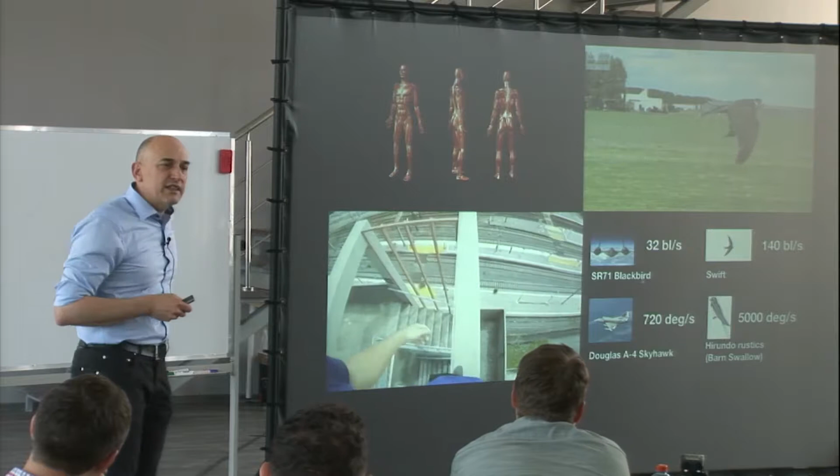No way. And in physics, if you think about how far engineers went, look at these examples of planes - as long as I know, unless there are some more secret ones in Russia that I don't know about. The Blackbird is the fastest plane publicly known, which can fly 32 body lengths per second. And it is nothing compared to a Swift - a small bird that can go 140 body lengths per second.

And if you look at a Douglas A4 Skyhawk, it has a roll rate of up to 720 degrees per second, but a little bird can do about 5,000 degrees per second. So that is the top of the line, and we are far from being able to repeat this. Why I use the example of birds, you'll see at the end - some people know why, but we'll see it at the end.

So what I think is very important is that when you talk about interaction, forget about the standard paradigms in control. That is not what you're going to need if you want to do this kind of thing. So what I will do is concentrate on using a physical structure that Arjan introduced, because as far as I'm concerned, it's the only way to do it. And I want to try to control the behavior. Let me explain briefly.

So what you do normally if you have a robot, people say, suppose I have a robot here, and this is my environment. People say, I want to control, for example, the force. Here is where they interact. Suppose I'm touching this table. In robotic control, people say, okay, I want to control the force I apply to this table, or I want to control the velocity or the position of my hand.

Robustness is a big problem. The environment cannot be properly modeled. Suppose you want to build a robot that shakes hands with a human—I was telling that at lunch.

If you want to talk about stability, and you have two dynamical systems, of which one is the control robot, you know pretty much a lot about it, and one is the human, because that's the dynamical system, how the hell are you going to prove stability about it? You tell me that you have a good model of a human? Bullshit. There's no way.

And you can have unexpected behaviors. Instead, if you use energy, or better, energy awareness, so you do everything by not forgetting that what you are doing is controlling a physical system, you need to track and control the energy flows. That is something that Arjan mentioned. I will go further in that. You have never a problem with stability. I will show you how.

It's a theorem that I can show you later. You are intrinsically robust. Suppose that this is your robot, and this is your controller. Arjan was mentioning this. Suppose that I can, and I'll show you how. This is in discrete time, because you will have sampling and stuff. But suppose you can actually build something like this, suppose you could physically build this thing. This cannot get unstable. This is intrinsically passive, right?

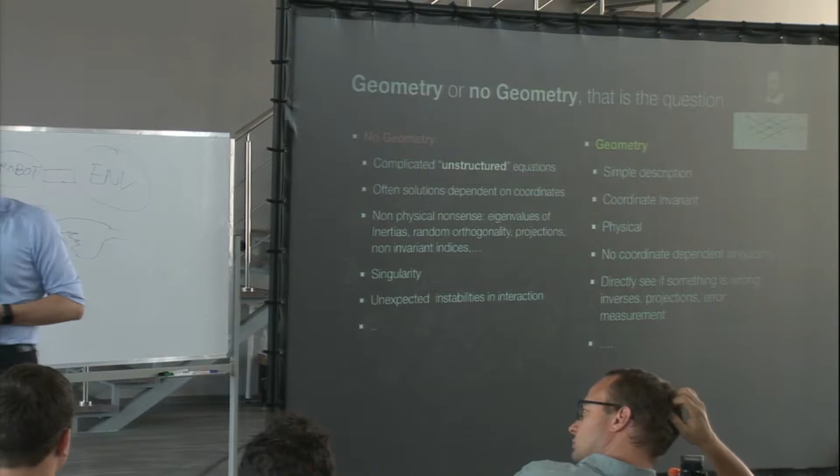A typical example, if anybody of you is working in robotics, is rotations. You know that rotation has a very strange topology. It would be nice to talk about rotation for the whole 3 hours, but what is known about the topology of rotation is pretty nasty. People very often use, in robotics, what are called charts in differential geometry—using Euler angles to describe rotation. It is well known that you cannot cover the whole rotation group with Euler angles, and then you get singularities if you are not careful about it. Instead, there are methods to do it properly and without any singularity.

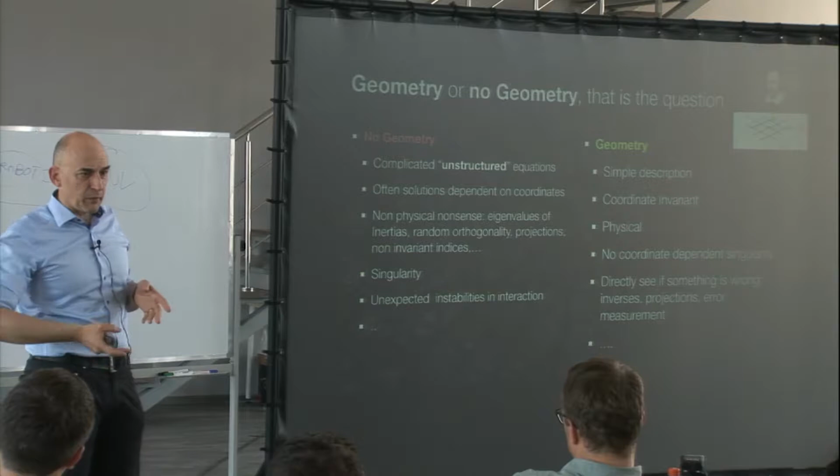And again, projections - that's another thing you see again and again. If you talk about projections, and also Monday there was something about projection, it can be made invariant properly, but you cannot define a projection on a subspace without being careful, because orthogonality, as if you are in Euclidean space, you know you can define orthogonality.

If you have orthogonality, if you have an inner product, that's fine - you can always define orthogonal complements and stuff. But if you are, and certainly that's the case in multi-body dynamics, in a 6-dimensional space, you don't have an inner product. There is no invariant inner product in a space of motion of rigid bodies. So you cannot take orthogonal projection.

Makes no sense. The only thing you can do is define - this is something I hammer all the time, because students have a lot of misformed ideas from bad education about it. So if you have a subspace like this and a vector, and you say I want to project this vector here, everybody would do like this, right? That makes no sense - this implies you have defined a complementary subspace, which is this. But in general, if you don't have an inner product, it depends on what subspace you define.

Suppose I define this subspace - the projection of that vector on this, along this subspace, would be zero. So it really depends. Be careful about geometry and the choice that you make. And this is the point I want to talk about, because in the case of multi-body motion on kinematic pairs - I won't talk much about it - this space is called SE3, a 6-dimensional space with no inner product. So when you want to talk about composition of motions, you have to be precise, otherwise you make assumptions which are nonsense. So geometry is very important.

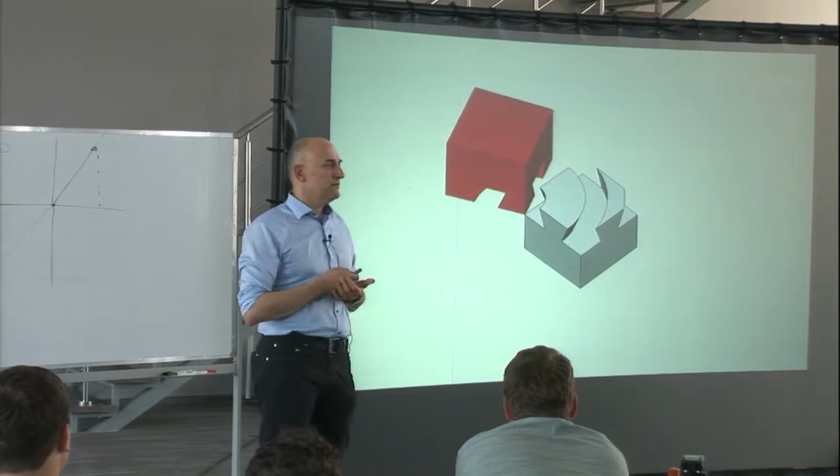Okay, now you see, well, you tricked me. Are there other solutions? There is clearly a symmetric solution, 90 degrees. Are there more? Now you start thinking. To be explicit: you fool me once, you won't fool me twice. Well, it turns out you have an infinite number of solutions, which are all hidden. This is another one. There is another one - I think I have 3, 4.

But why do I show you this? I think this is a typical situation where if you've always been used to seeing things the same way, you don't see what is behind. So in control, and certainly if you're doing control in robotics, you've always looked at regulation problems, control of position, of forces - that's the way you think. You don't think differently.

And instead, the paradigm that Arjan started to introduce today is different. You look at it differently - it's not just about signals. Physics is not about signals. Physics is about physical interaction via energy. And the structure you need is the structure of power ports that Arjan introduced this morning.

Okay, so what I will talk about in these 2 hours are 2 things. The first one is energy-aware robotics, which will basically show how to handle robotics, and some tricks that Arjan already anticipated. Then I will talk about something a bit more advanced, but very, very basic.

I want to show you that if you want to interconnect parts which are very complicated, like a network of resistors and inductors, there is not much geometry there. But if you want to talk about multi-body dynamics, that's a different ballgame. If you want to model a human being with all degrees of freedom, that's a different ballgame. You'll need certain other structures, which I will tell you why you need.

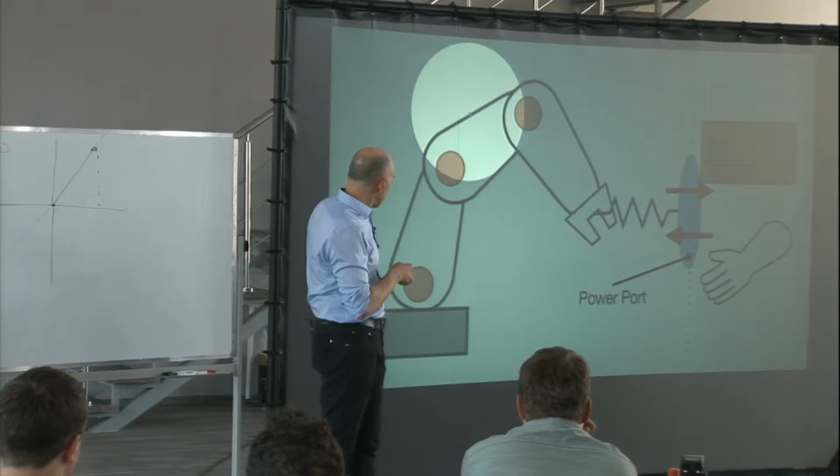Good. So, also the issue of robustness was mentioned a couple of times, and this is an example I was doing for the table. What is interaction? Nothing else than this: you have a robot that you control, whatever it is, and you have your environment—the hand, the wall, whatever. Interaction of the robot and the environment will be bidirectional.

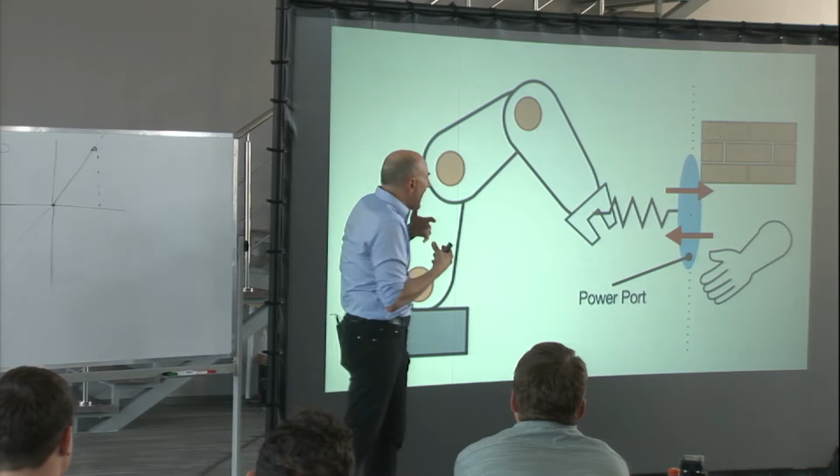This is the issue I was mentioning before on behavior. You can control how my system will behave with the environment, but I cannot control only this variable, because this variable will depend on the other one. It's bidirectional. So, as introduced this morning, this is actually the paradigm you need: you have a controlled robot, and then you have the environment, with these bidirectional signals. And this is causal. Now, it was not presented as causal.

In principle, physics can describe everything acausally, and I will show you—this representation that Arjan has shown is completely acausal, and there's a lot of advantage to that. Actually, he presented two situations.

So suppose that I want to describe the behavior of my controlled robot, okay? Then you will have something like this: effort plus F flow equal to 0, where these efforts and flows are the two variables which are there, okay?

Now this is acausal. I just say there is a relation between efforts and flows, right? And the environment will be something similar. So this is the robot, and the environment would be something like that as well. Environment F, okay? Once you have these two things together, you can solve them and get effort and flow as a function of time.

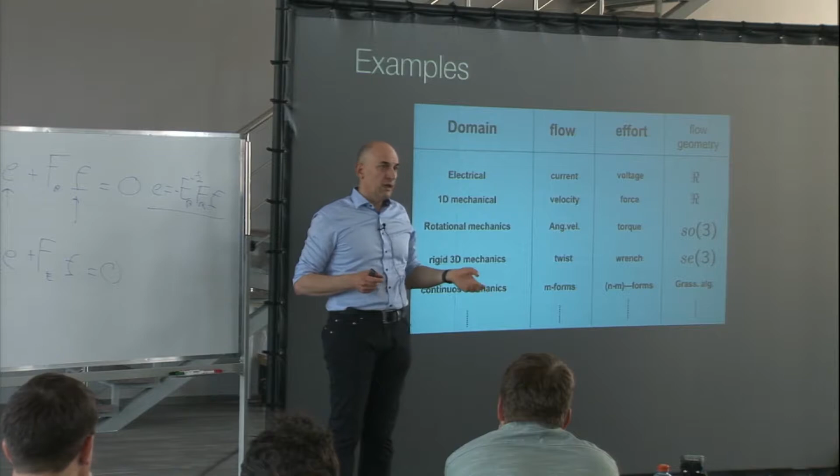And then these efforts and flows are not just a bunch of real numbers, they are geometric entities. You know what a covector is, duality? You know what a vector is, you learned to talk about vectors. A covector is a different thing - a linear operator from the space of vectors to real numbers, okay? And if you talk about mechanics, velocities are vectors, forces are not vectors. Forces are covectors, okay? They transform differently.

And if everything is orthogonal and stuff, you don't need to bother about it. But if you talk about multi-body dynamics, nothing is orthogonal, so you have to bother about it, okay? And the geometry will therefore be given here - I will tell you this is actually our Lie algebra of a Lie group, and I will tell you why you need to talk about Lie groups in any case. That's the second part of the lecture.

And you can go to continuous mechanics. I'm going to show you something about it, and the geometry there is even a bit more complicated - it involves differential forms, Grassmann algebras, in which you have to introduce new concepts, this duality, and how you define the Dirac structure, things that Arjan mentioned before. So it's important to realize that in this business you need something like Lie groups, and this will be the second part of my talk.

And you have water. The water flowing through this pipe is energy, and is incompressible. So if you pump water here, the water will come out somewhere else. And if you pump water here and here, it has to go there. If you pump water here, here, and here, and here, it has to get out from that - there is no other option. So the total amount of water going in is zero. That's the fact that Arjan showed, that is power continuity, okay?

And it has again this structure in which basically this R here will be all the damping, and this C here will be the storage of energy, kinetic, potential energy, and all these kinds of things.

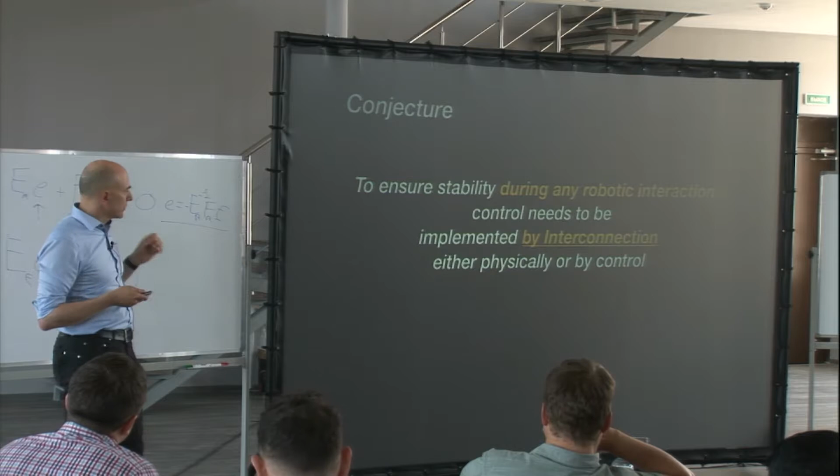So the conjecture, which actually cannot be proven formally, is this: that to ensure stability during any robotic interaction, control needs to be implemented by interconnection. And I will go more into this, Arjan already introduced it, but I will expand on it.

Either physically or by control. What do I mean by that? First of all, what is control? When you think about control, you think, okay, you measure something, you use your computer or whatever nowadays, you do calculation, you steer something. That's control. But control is also building a machine in which you take a spring and place it in the right place. Control is changing the dynamics of a system you're given. So you can do it that way.

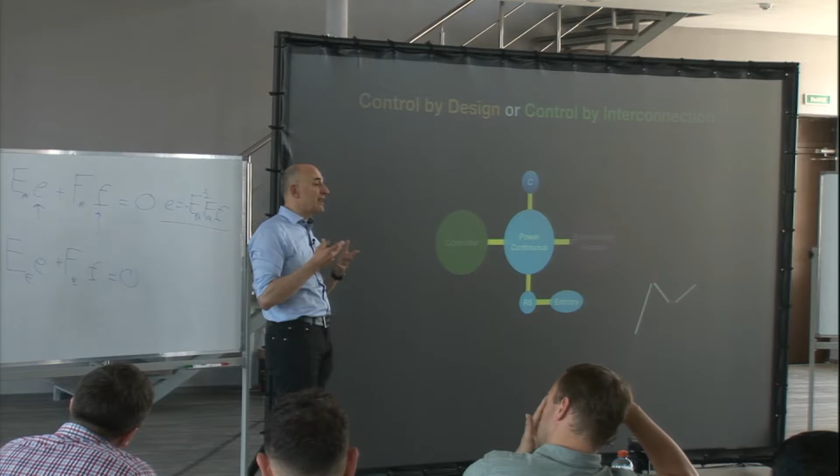So suppose that, with what you've seen this morning, you can model everything with this framework. So what you could do is say, okay, I model my mechanism, and then for control I could say, I have a spring which I can model in the same way. And Arjan showed you that it's basically an algebra. You have a Dirac structure, you can formally prove that you can assemble it, you get a new Dirac structure, and you sum the energy. It's like an algebra which stays in the algebra.

So basically what you do is something like this: you get a new system in which you interconnect the spring to the mechanism. This is your control system, which now has a new port, depending on how you build it. This is one way of doing control by interconnection. This is physical interconnection. You basically take the spring, you solder it onto the machine. And this is very useful.

What you can do, actually, what we did, for example, I will come to that later. We are here at ITMO, building a cheetah. This is something I did in the past with somebody from MIT, the MIT cheetah. One thing was, for example, you have the back and the front of the cheetah, and a lot of cyclic energy. Why is a cheetah going so fast and so amazing?

Because it's not doing control by signals, but it understands the physics. Basically, the muscle structure and the springs and tendons in the spine are such that it can use the energy very efficiently. So basically what we did, if you want these things to locomote, all the force that you would actually inject and damp by normal control, you can do it by placing a spring in the right place. And this is actually what we did in this work. I will talk about this more specifically later.

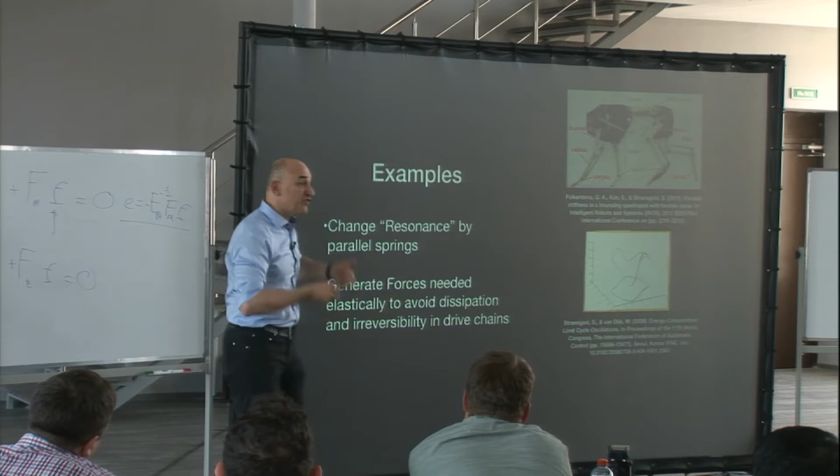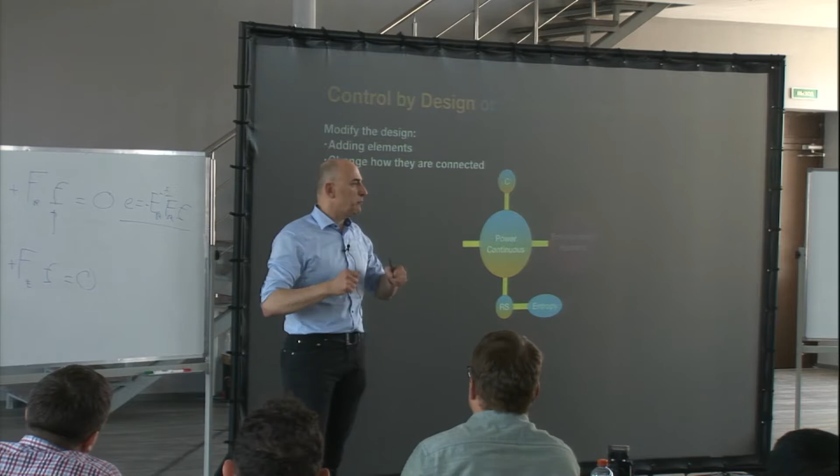So this is physically, we put a spring in the thing, and we're actually doing something similar here. What we also can do, still physically through control, is this: very often when you have something that oscillates, a mechanical system, what do you do? You inject damping. And inject could be by control or by putting material. If you have something that vibrates, like a drum, what do you do? You put something damping, some mass, and try to damp it like that. So if you have a machine you want to stabilize, damping may be a solution.

But damping has disadvantages because it solves your problem, but it costs you energy. And if you have a mobile device, that's not what you want. So you can achieve the same effect but store this energy somewhere instead—you can be much smarter than that. What you can do, with these RS elements I talked about before, is build something that, if you look at it from this side, feels like a damper. It definitely feels like a damper.

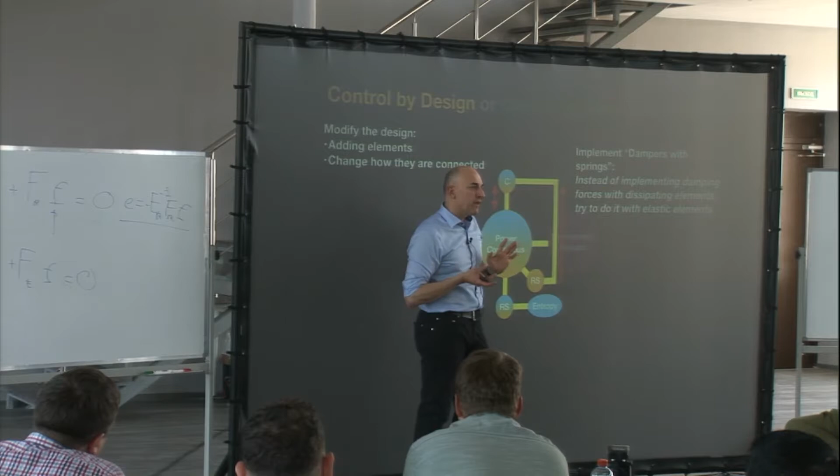Instead of building something like a damper where physical heat is generated and thrown away into the air, changing the climate, you can build something that feels like a damper, but the energy isn't thrown away—it's stored, and whenever you need it, you use it again. This actually works very well.

This is a patented device that we built—a prosthetic device. Basically, what it does: you see this line here that connects the upper femoris to the ankle down there. This extension is basically a spring.

When you move the leg, you have kinetic energy in the lower leg. When it's straightened up, that kinetic energy is stopped with this spring, done in such a way that when the leg is straight, that energy is completely in the spring, but then it's blocked—it doesn't come out anymore. It's like a damper from the side of the motion.

Ottobock and Ossur, which are the leaders in the world on this, are two enterprises that sell a lot of prostheses. They have a rheologic knee—a knee that basically, with the fluid, the brake energy is gone.

With these things, what we do is use this energy—you see this switching here. In the next step, that energy is used for the gastrocnemius muscle, because walking is nothing else than falling all the time. So you raise the potential energy, you fall. Next step, you raise, you fall. You raise, you fall, and then energy is regained. In this way, we regain 80% of the metabolic energy that would otherwise just be thrown away.

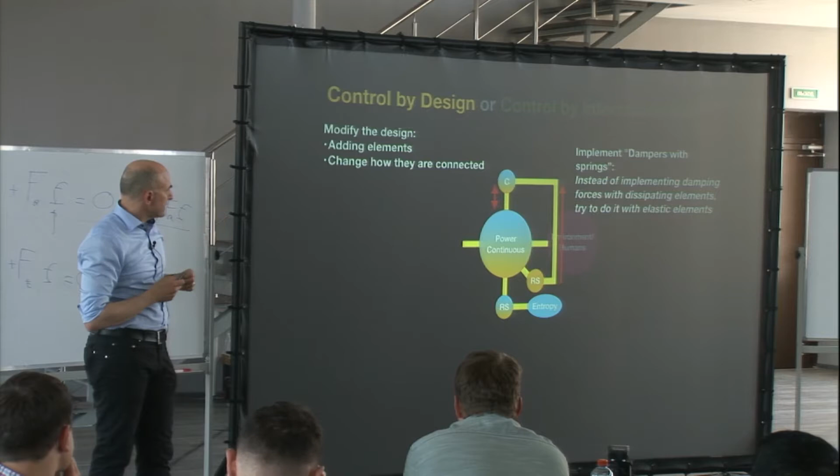So this is a much better device. This is the idea of using the energy, but of course you can also do control—I'm going to show the most standard way of doing control, but without losing these features. So this is one way of doing it, but how can you do it properly?

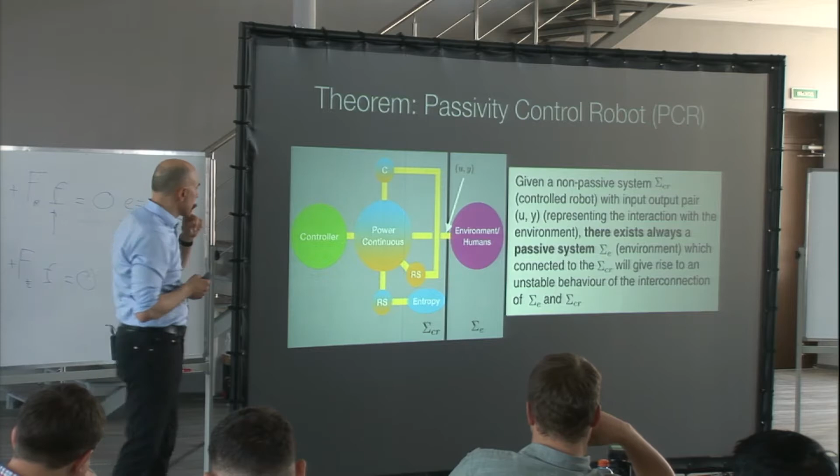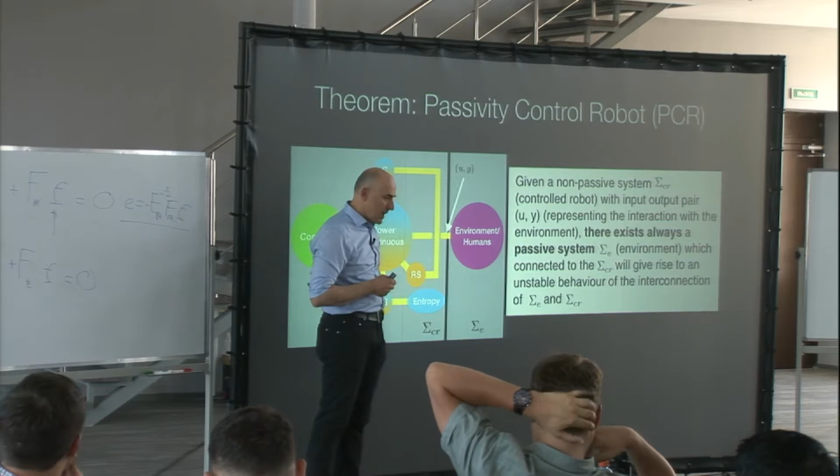This relates to the theorem I mentioned before, which I proved formally. It tells you this: suppose this is my controlled robot, and this is the port—the port of interaction with the environment, the interaction port. I proved it formally, and the proof is amazingly simple, but no one had done it before.

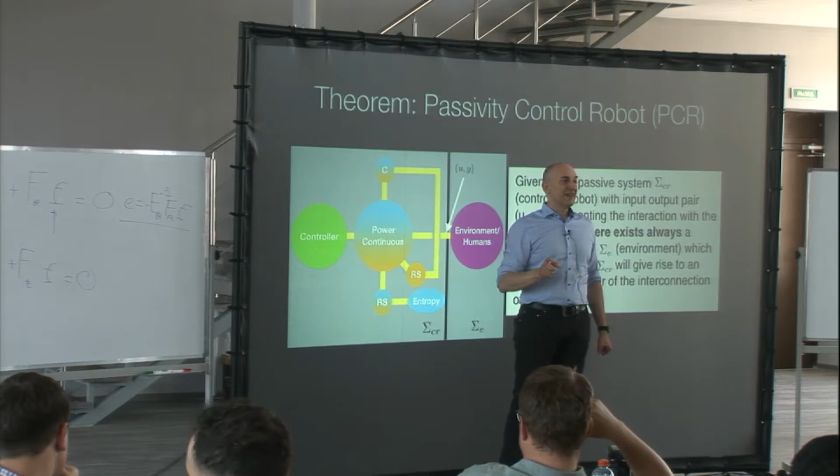If the system—now I'm looking at the system from here—if it is not passive, or let's say the energy which I can extract from this port is not lower bounded, so the controlled system, with the control and everything, allows me to extract energy, then I can prove that I can constructively find an environment which is passive, which is lower bounded, but such that if they touch each other, the system becomes unstable.

This is interesting because I'm saying that if you want stability in interaction, at least for a passive environment—whatever structure it has, a table, a floor, a human being, which is passive in principle—the only thing I can do, with no structure information, is to make this system have lower bounded energy. So it's really a necessary condition for stability that the control system is passive, that you cannot extract energy out.

So what does that mean? It means I can immediately exclude state feedback in the standard way. Because if you do state feedback, you lose what is known as collocation—if you measure something and actuate something else, you lose track of energy flows immediately. Do you know what collocation means?

If you have collocation, it means that if you have a motor, with the motor you apply a certain force, and you can measure the corresponding dual variable at that same spot—that's collocation. For example, if you have a motor here with an elastic torsion spring, and you measure the position here, you know you can have vibration; stability becomes an issue because you have no collocation. But if you measure here, it's not a problem, because you can always monitor the energy you inject into your system. The idea is that if you do state feedback, you measure here and actuate there.

So this is the system, okay? Suppose that this is your robot. The first step you can do is say, okay, I put actuators. Actuators are a physical device which are passive. An actuator has a mechanical part and an electrical part. So far, so good, it's still passive, okay?

So what you do then after the actuators, you put an amplifier, right? You put a power amplifier to drive your motors. And there is where it starts getting nasty.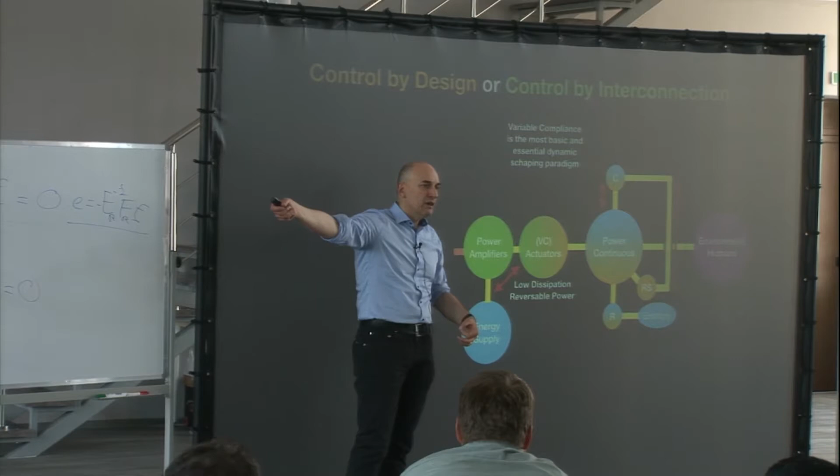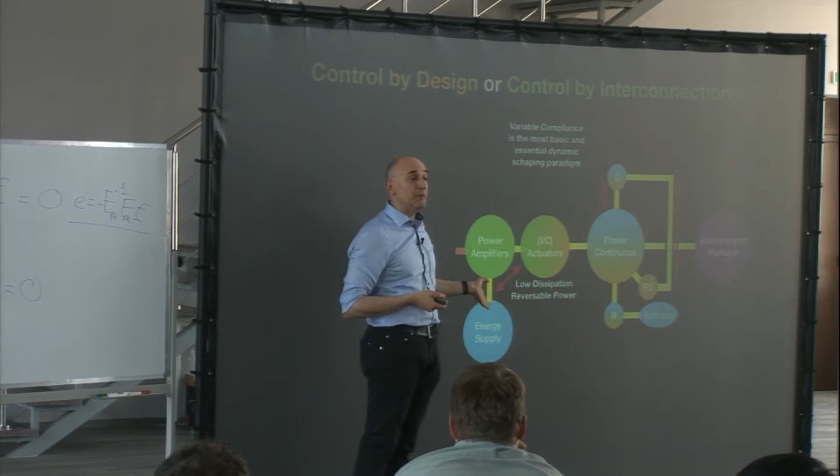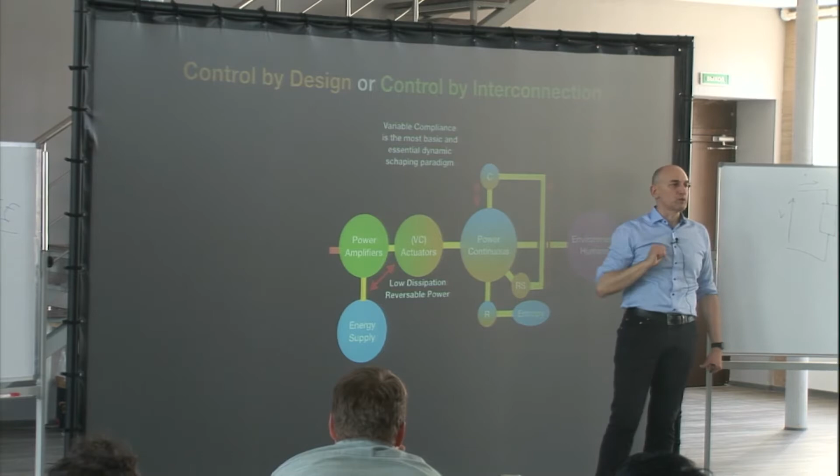Because what do you do? You connect this to a power supply. So what you actually do is you have either a battery or a power plant behind, and you can have an energy flow to your system which is unbounded. That's something you don't want, because I showed you that if you do something like this without thinking about it, what happens is you can extract that energy in one way or another, and you can get all the energy from the power plant close by, and the system can get unstable if it touches an environment which is even passive, as I showed you.

All right, now what can you do about it? Well, you can do something. This is continuous time, we are in continuous time, the physical devices. So if you do control like this, where you just measure something and actuate, this is prone to error, because as I told you, it will not in general satisfy the fact that you cannot extract unlimited energy from the environment. So you have to do it differently.

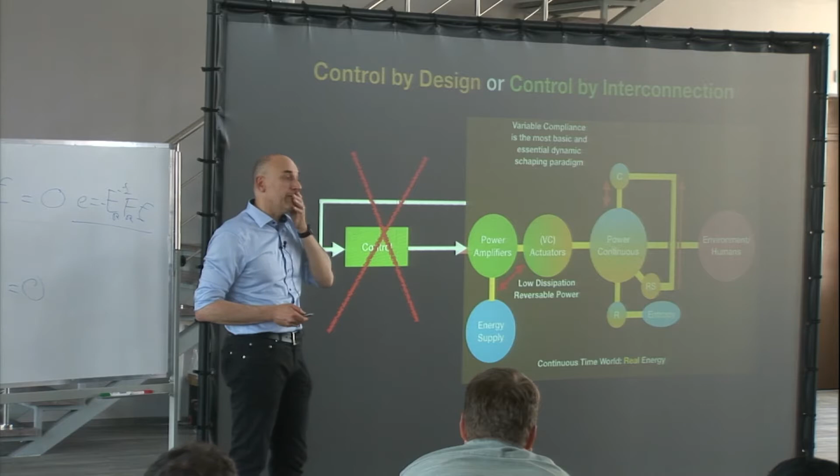And the first thing you need to do is virtualize the energy flow. So what you want is that your power amplifiers, of course, are attached to the power supply on one side, and on the other side, if they are a transistor bridge, H bridge, I don't know if you're an electrical engineer or whatever, you have the signals that control your power amplifier. That's the value that determines, and from there you determine how much power, physical power, you inject, at the base of your transistor, your MOSFET, whatever.

So you want to do something like this. And then what you do, then you are in discrete time. You see, I changed the color. Now everything which is in orange, I want this to behave like power bonds, but now it's virtual. Here's physical energy, it's the real stuff, the energy in Joules, that if it falls on your head, you feel it. This is the virtual one.

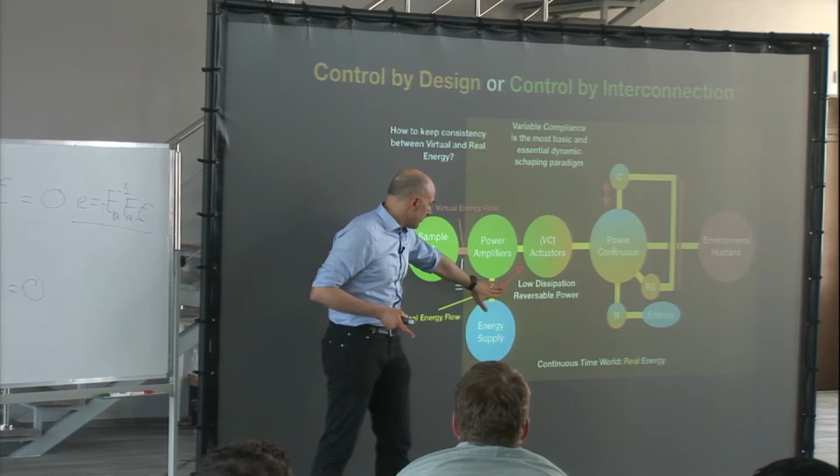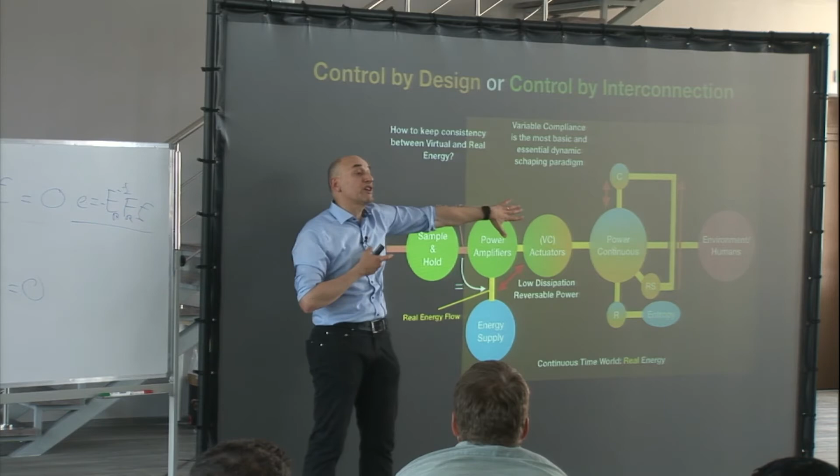But I want to do things in such a way that whatever comes here is the same as here. So basically, this physical energy comes from here, clearly, but I want to do it in such a way that whatever goes here is the same as here. Because then I can build a controller which knows what's happening physically, and that's the idea. So that's the real-virtual energy flow.

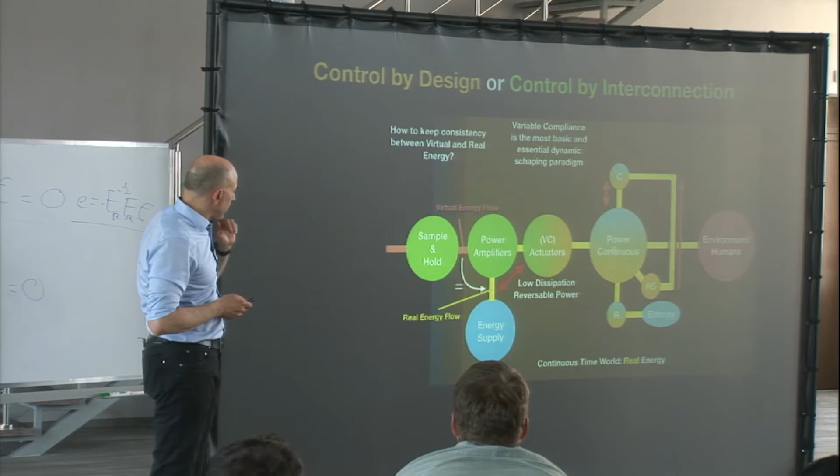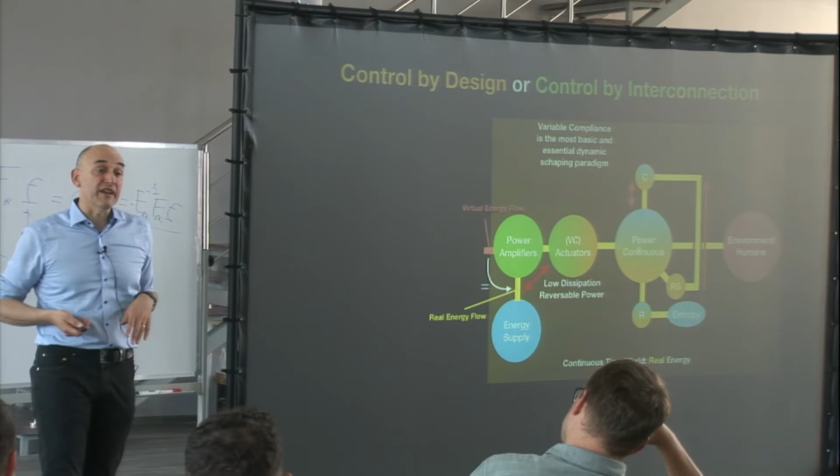So, can you build this coupling? This is the issue here, because very often when you do control, standard speaking, you say, okay, I have to develop control for a physical system. How do you develop your control for discrete time? You say, okay, if I have a high enough sampling frequency, then you can do the control design in continuous time, and it's okay. Or you do a complete discrete design, that's another option. But here it's different, because it's not just about the signals, you want energy consistency.

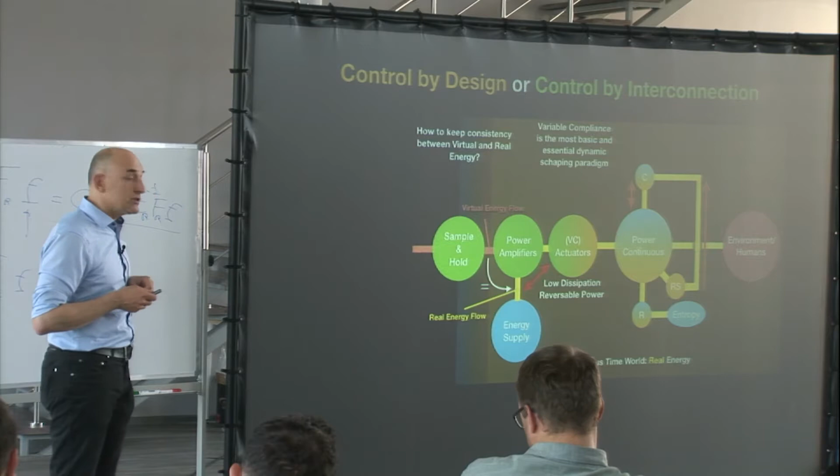So what you can do is actually very simple, and it's indicated here. Suppose that now you have a robot, and you have your controller.

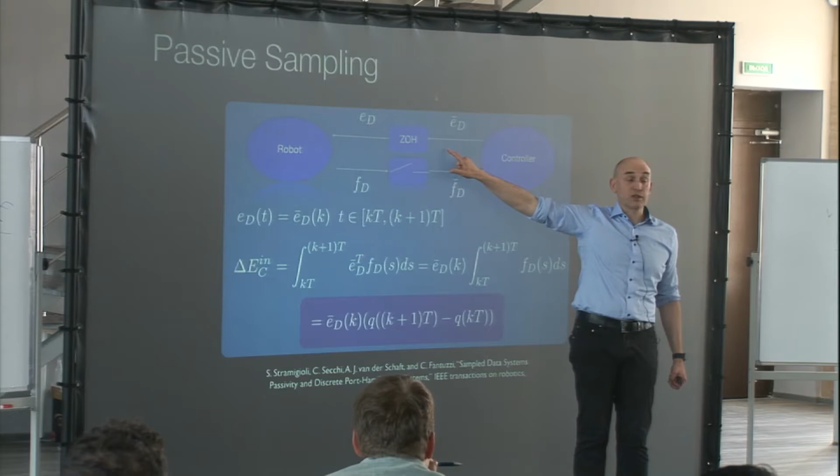And what I see is a lot of reflections. So in the middle you have a zero-order hold. Suppose your controller sets a certain force or current, usually through a current amplifier, then you have a voltage loop. So you can set a current on the armature of your motor, which results in a force, right? And this is furthermore a zero-order hold, meaning it keeps that force constant for the sampling period.

Okay, look at this, what I'm doing is the following. Suppose time goes in this direction, so here's K, and this is K plus 1, sampling speaking. What I'm doing here is I measure the position - I'm talking about one direction, one motor for now - I measure the position and I set the force. Then things move. The force is constant because the zero-order hold will keep that force independent of what the thing does. So the force is constant, and now I'm at K plus 1. What I do is measure the position again, and set the new force.

What can I say about what happened? Well, the force I know because I set it before. And I know the position when I started to set that force, and the position now. It turns out, which is pretty trivial, that if you want to calculate - and now I'm not approximating - the physical energy quanta that was exchanged from here to here, this is not an approximation, this is physical energy. What is the physical energy? It's the integral of the product of force and velocity, the physical ones. The force I know because I set it and it was constant, so you can pull it out of the integral. You're left with the integral of velocity. What is the integral of velocity? A position. That's not an approximation, that's physics - if you integrate velocity, you get position.

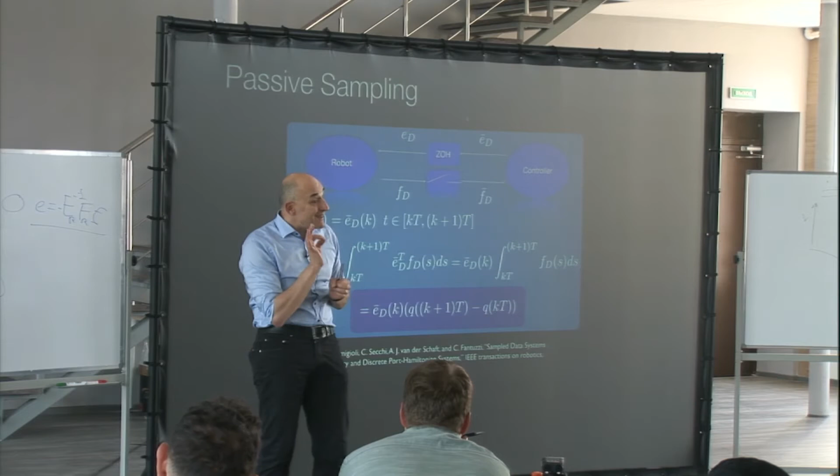Well, of course, what can happen if the dynamics of the system is big enough, is that I measure zero energy exchange from here to here, but a lot of energy could have gone out and then a lot came back, and I measure nothing. But if the sample time is not 300 years but decent, at least you know you're not making bullshit - you can exactly know how much physical energy has been exchanged with the physical system.

But that's exactly what we needed, what we wanted to do, because then I know how much energy went from my amplifier to the plant. So if I have a variable in my discrete controller that says, okay, this is the energy I want you to use, and it was 100, and I measure that I gave 1 joule instead of what's needed, I just change the value of that variable to 99, and everything is perfect. Does that work? Well, it works pretty well, actually.

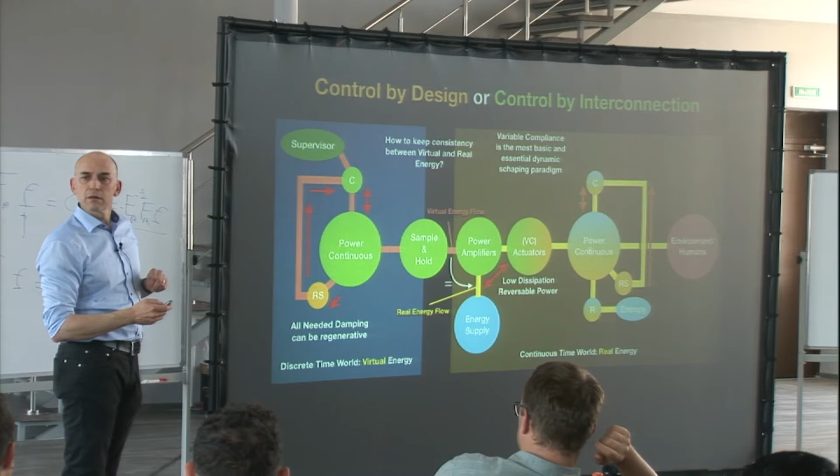So if you have this, and you do the sample - oh wait a second, should be a video to show you that it works. Wait a second now, because I want to show you this. Strange. Oh, it comes back later, okay. Yeah, no, okay, it's later.

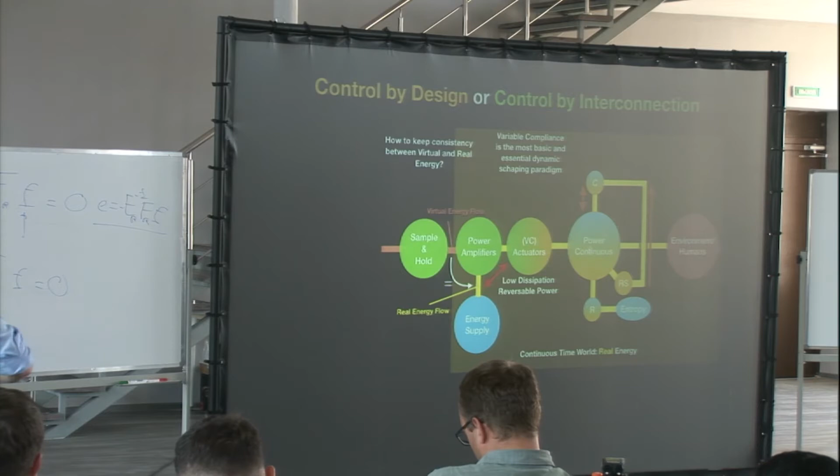And then once you have taken care of this balance, the energy balance, okay, we solve the problem of interconnection between the continuous time and discrete time. This is actually what I showed you before, and you have the fact that you want to do your control design.

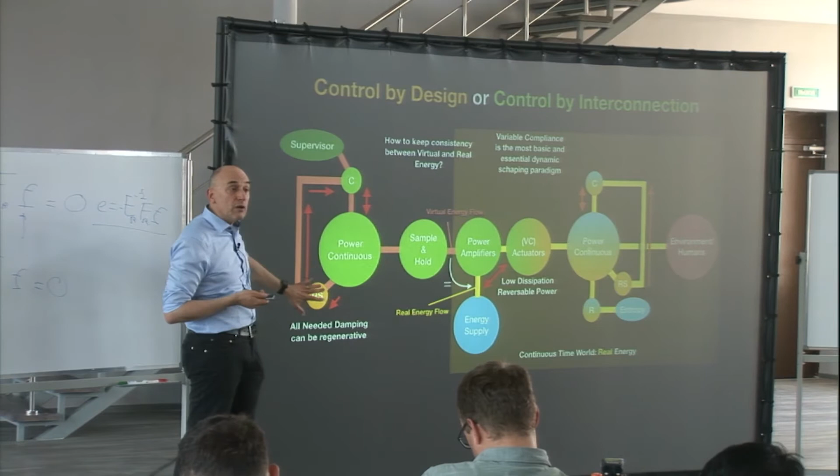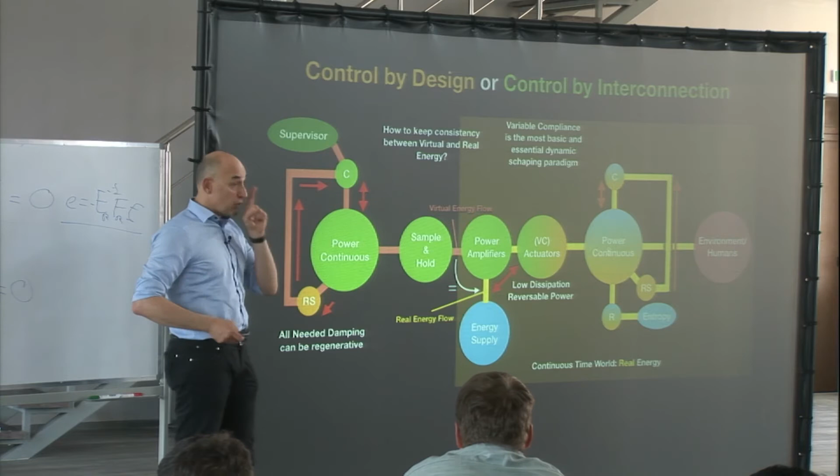What you want is to make a control design which is physical. Because if you have a physical equivalent kind of controller, with physical elements like springs and dampers that are passive, then you know that whatever I do, I can never extract more than the energy I have at my disposal. Everything is done on the basis of energy balance, you see?

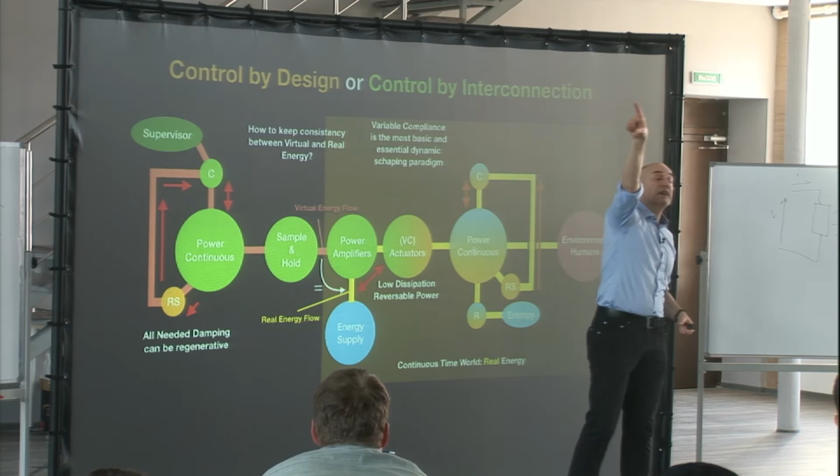But of course, to do work, you need energy. If you ask a robot to bring me these bottles, bring it upstairs, you need energy, of course. So how do you do it?

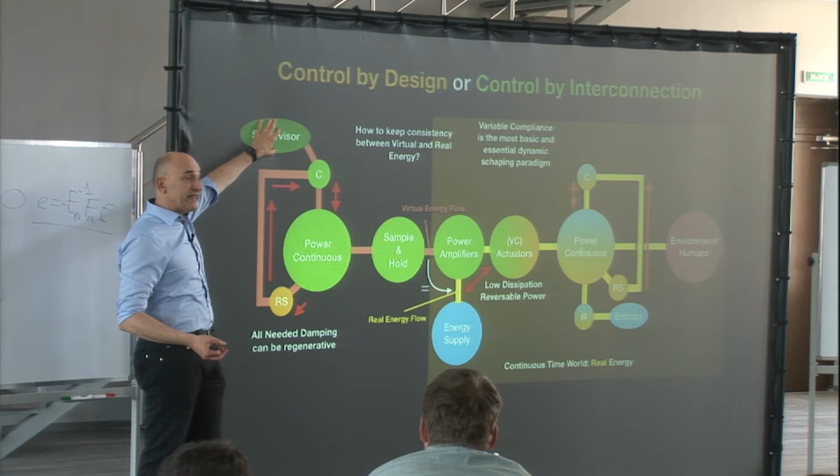Well, it's clear that you will have a supervisor, at a lower frequency rate, which will basically say, okay, you need to do that, that's a budget I give you. You're too young to have kids probably, but when you have a kid who doesn't know about money, you don't give a credit card. You say, okay, here's $10, buy this. And if it comes back saying it was more expensive, okay, I give you more. That way you're sure your bank account isn't going to hell.

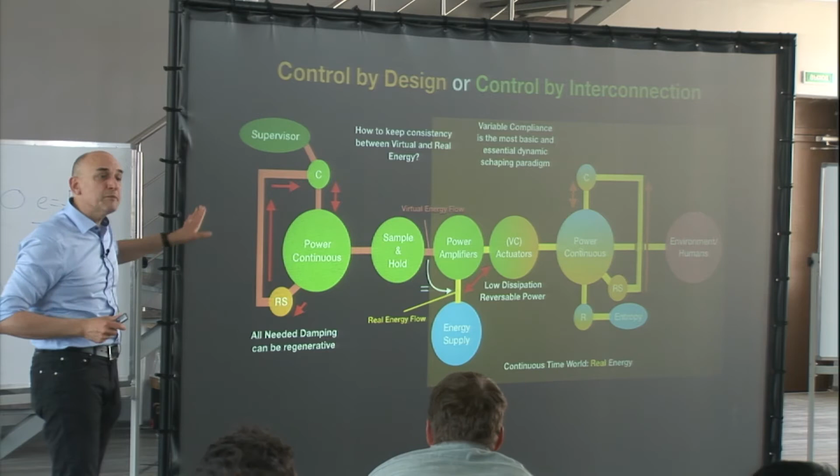The same story here, and this is exactly what humans do all the time. If I give you this bottle, place it here and glue it on the table, and I'm sitting here and ask, could you bring me this bottle? What you do is go there and do like this, and then you say, what's going on here? You replan. That's why humans are so stable in every kind of interaction, because everything is feed forward, basically. You plan the energy, you plan the path planning, and you actuate. And if something goes wrong, you replan.

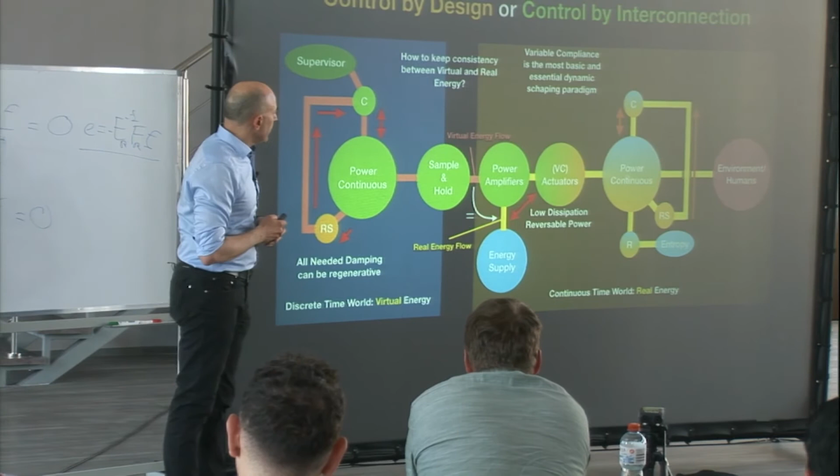All right, so let me give you an example. This was actually something Arjan already showed, but he didn't show you the nuances of it, which is something I did many, many years ago. Suppose what you want to control is this robot, this mass, okay? And I want this behavior. So what I told you, I don't want to control force and position.

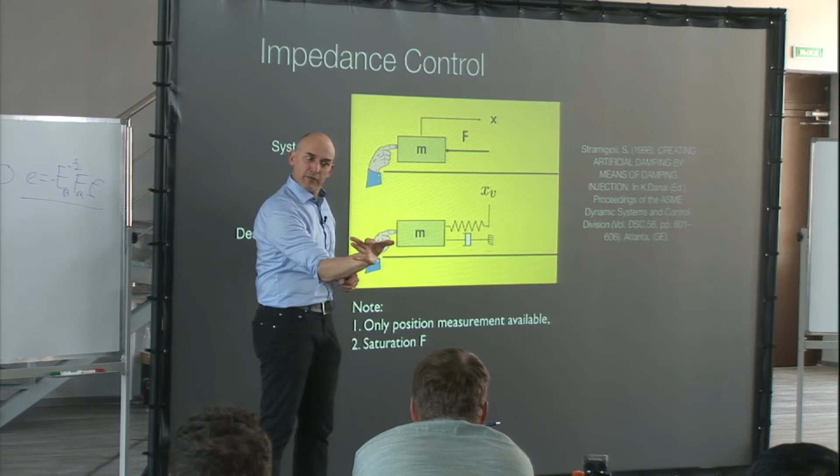I want to feel certain things, a certain stiffness, and I want to have that damping. So if I put this and kick it, that's a certain behavior. Because if I want to pick up an egg, and I don't have my glasses, you will not pick it up very precisely. If you see exactly what to do, you can go very precisely. But if you have very stiff hands, a very small error in position will give you a very high force, and you break the egg.

But if uncertainty plays a role in your interaction, you want to be compliant. So this is what you want to do, but there are two conditions true all the time. One is that position measurement is available, you don't have velocity measurement, and you have saturation of force. The force you can apply with the motor is bounded from up and down. Every motor, you cannot buy a motor and expect it to behave like a Ferrari. The motor is there, it will be limited.

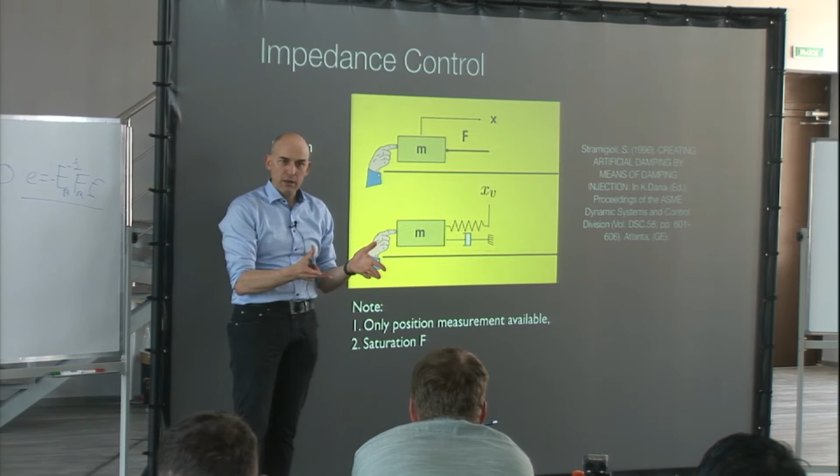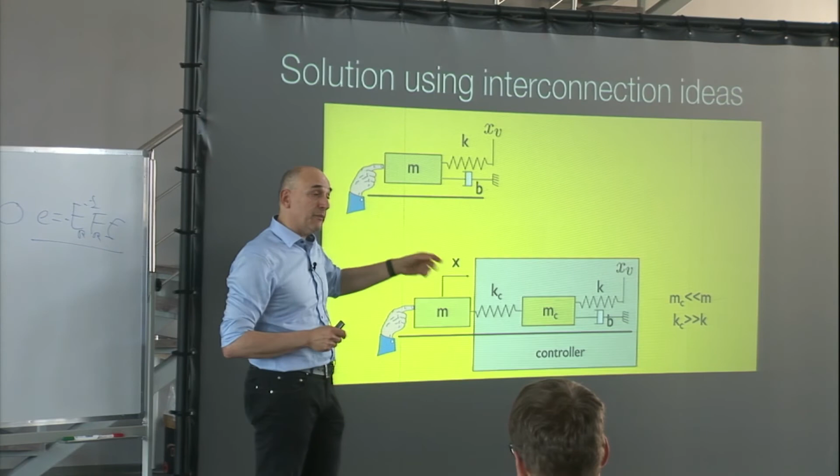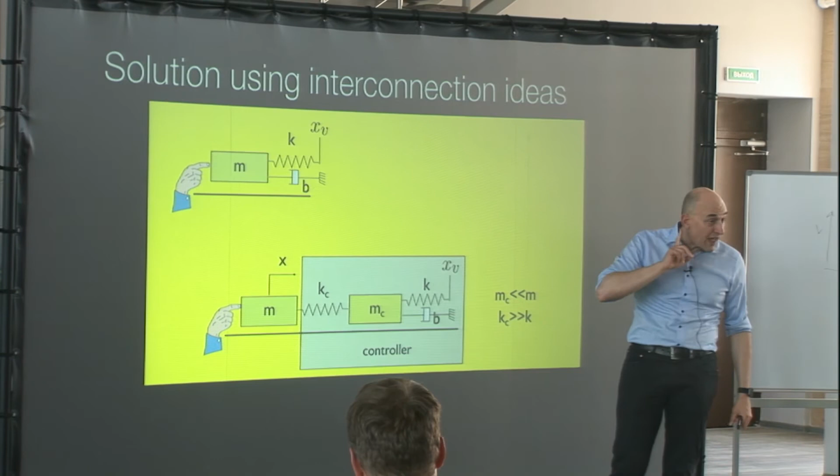So I'm going to show you, you can build something like this, but I didn't tell you what the advantage is. So this will clearly be my controller. There's an idea I have about system reduction which is pretty cool, but I won't talk about that now. So what you have is this controller, and suppose this stiffness is much higher than that stiffness, this spring is much stiffer than that spring, and this mass is much smaller than this.

Now, if I touch that mass, what do you feel as stiffness? If this is much stiffer than this, you feel this spring, right? It's a series of two springs, so you feel the one which is more compliant, less stiff. Okay, fine. Second thing, why do I do this in the first place? Well, I need to put a damper, because if I don't, these things will keep on oscillating.

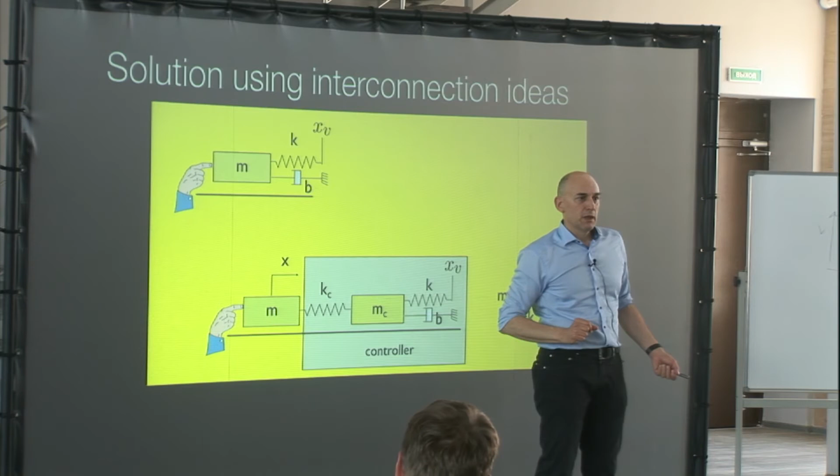But if I put a damper here, what do I need to implement that controller? I need to measure velocity, right? So how can you do it if I only have position measurement? I say, okay, you take the measurement and take the time derivative. Is that a good thing to do? Of course not. If you have a tiny or noisy measurement, that amplifies the noise. You don't want that, right?

Okay, you could do something model-based, maybe an observer or something. That's an option, but you need to know the model. If the model is wrong, you can have some problems.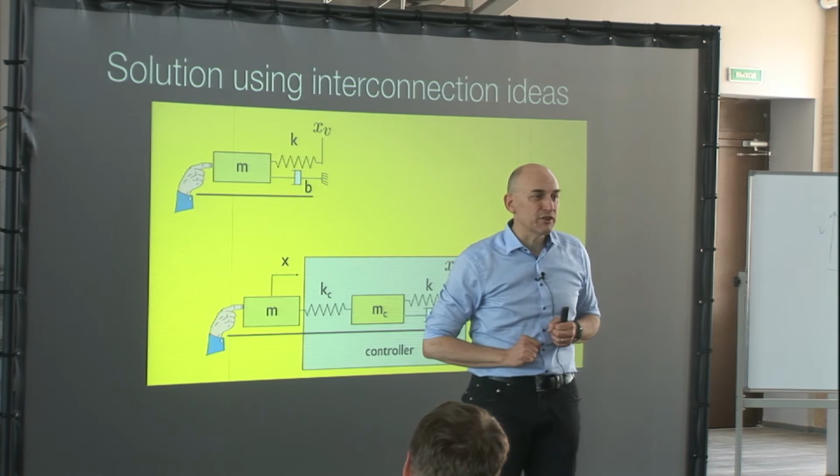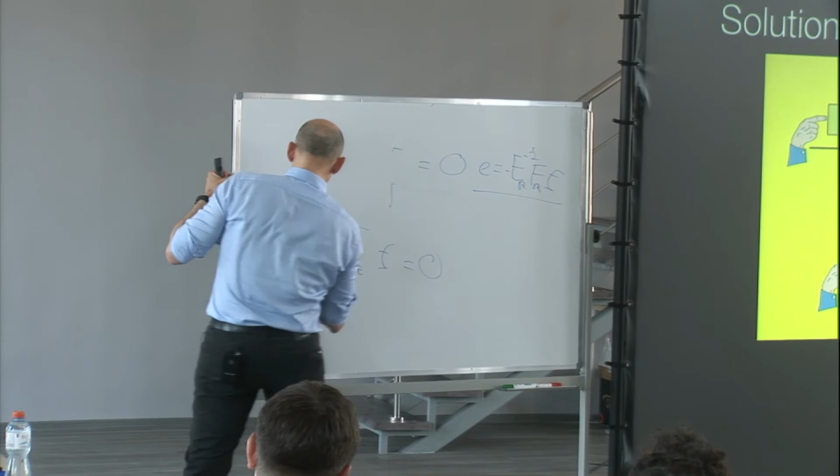You can do state variable filters. We were talking about this - do you know what a state variable filter is? It's a trick. Let me redraw what we just were discussing. It's something which is a very nice trick.

You don't want to differentiate, right? Because that's bad for noise. But what you can do is integrate. That's not a problem. So what you could do is something like this.

So suppose that this is a second order linear filter - simpler, you cannot think about it, okay? Now suppose you choose this gain such that the bode plot would be 0 dB for a while, and then it goes down. What is the roll-off? It's second order, 40 dB per decade, okay? So if you have here a signal which is in this bandwidth, what do you see here?

Same signal, fine. And what do you see if you peel it out? This - oh sorry, not this one, but this one. Not from here, but here. The derivative. But I've never differentiated, okay? This filters the signal and at the same time gives you a filtered version of the derivative. So this would be another way.

But once again, it's based on frequency here. It's based on hypotheses - not structural hypothesis, but a frequency hypothesis.

But if you do something like this, you do not need to measure - if you put something like this, you see, if I put a spring here, what I do here, I basically only have to measure this position because it's a spring. So how do you calculate the force you apply to the system? You measure this position, the one of the system. You have this position, a state of your controller, which you know. You take the difference, multiply by the stiffness, you get the force, you apply the force. You see? You only need to measure the position, right?

Okay, so that problem is solved. I don't need to measure the velocity. If I do it with the sampling idea, I also have solved the problem of the interconnection between the digital realization and the continuous time realization. There was another problem - the motor cannot give you more than a certain force, right?

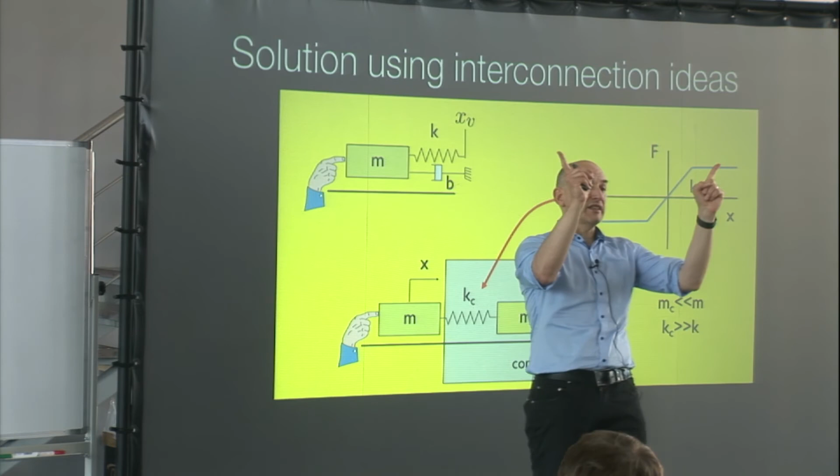Well, that's not a problem because something like this, what is it? This position-force, this is the motor, right? The saturation that you have in the motor. Well, it's not a big deal, because if you take the integral of this, what is this? This is a spring, which is a nonlinear spring, quadratic until that point and then goes straight. If you take the gradient of that, you get flat, straight, flat.

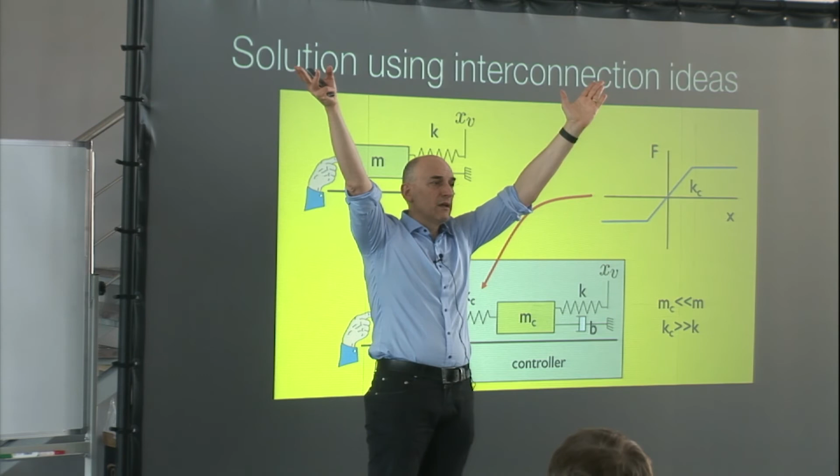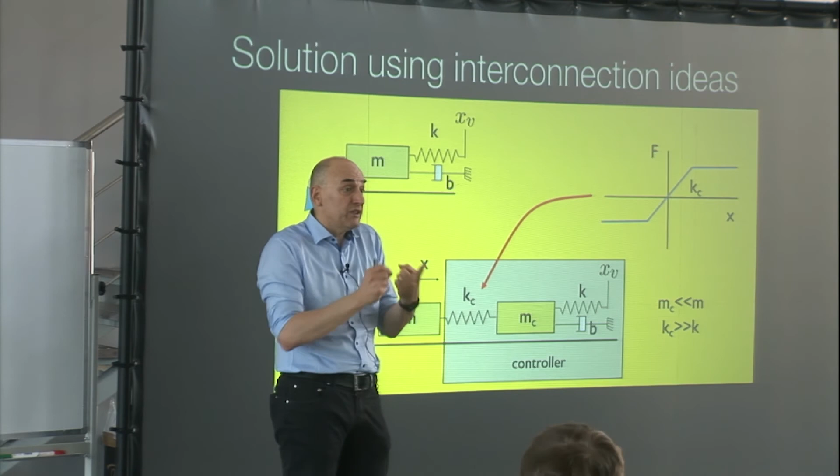This is a nonlinear design because the thing itself is nonlinear, so it's a nonlinear controller, okay? But completely from a physical equivalent principle point of view.

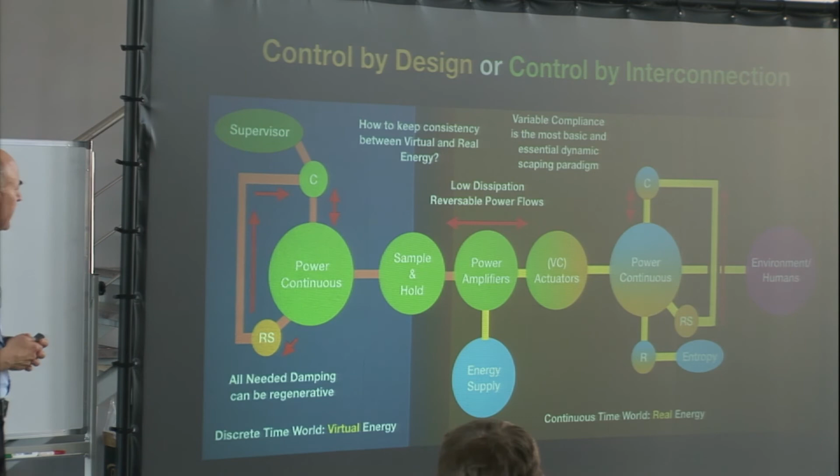So without doing the control, the first thing you can do, and this is really mechatronics. Mechatronics is sometimes used as a buzzword, but real mechatronics is really looking at the change of the dynamics in a holistic way, okay?

For example, what we did in the lab in Twente is, suppose you want to build a 2D cheetah kind of motion. So what we built is, basically, first oscillations, 2 legs that oscillate. The controller, which is physically based, I'll show you later, basically injects energy and takes care that you have 2 things that oscillate at a certain height.

That's it. And then you say, okay, I want these 2 things without any controller that measures one or the other. We want to build a physical connection between the front and the back, such that whatever phase it has, when I put it on the ground, it starts walking.

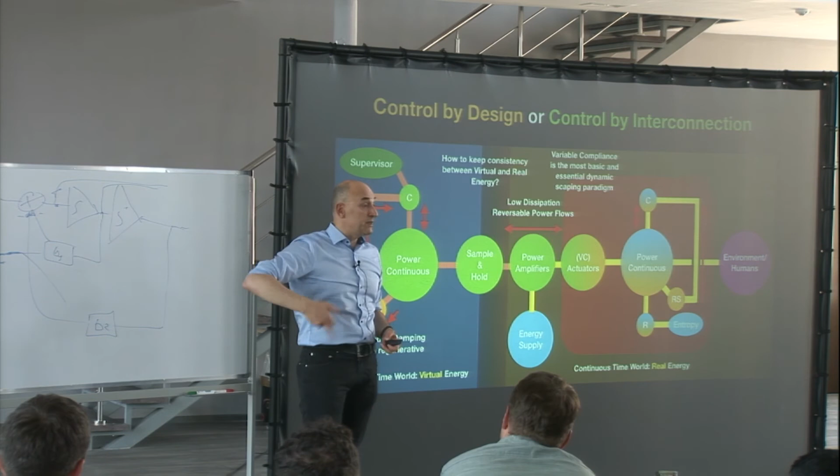It's like a cat - there have been terrible experiments, cats which have been cut from the cortex, and due to the CPGs, they basically kept on walking. There have been terrible neurological experiments, but it is something that also physiologically happens due to CPGs.

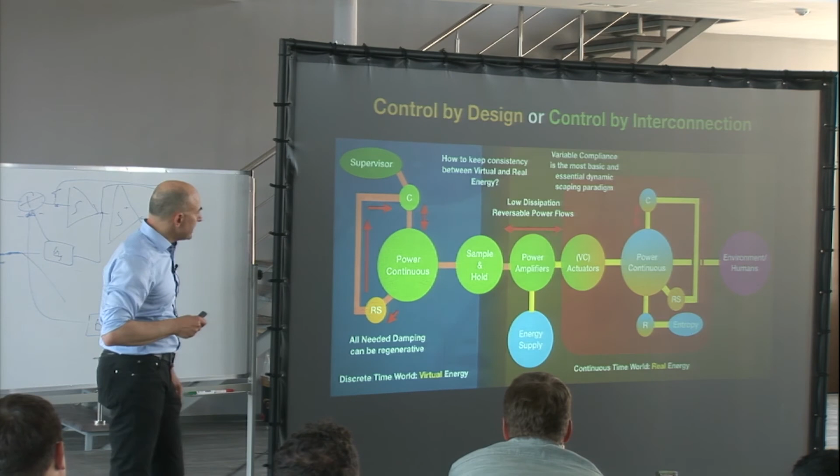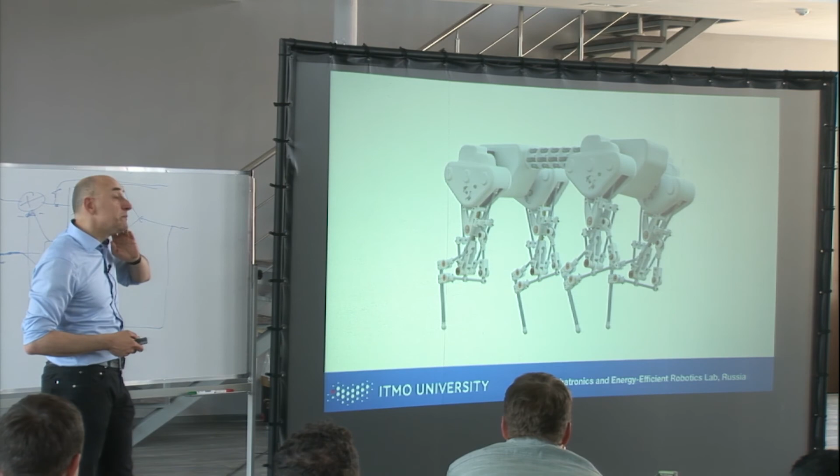And of course, this is what we want to do here at ITMO. We actually want to go further with this and make it multidimensional - same kind of design concept, but with multidimensional motion in all directions.

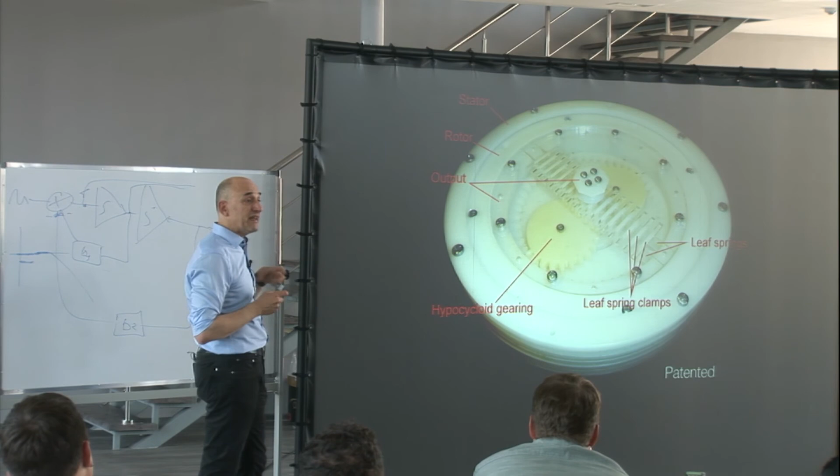Other things you can do - this is a device I don't have time to explain, but if you're interested I can show you. This is a patented variable compliance actuator. This is a device that, by design, can adapt the stiffness in a certain way, and you can build it into prosthetics and other things, which really change the stiffness coupling between parts.

Okay, this is also controlled. This is smart design, but you do it to control a physical system. So for me, I don't see a big difference between working with PDEs or building good stuff. I mean, it's the same thing. The goal is what counts, and the goal is to make stuff that works better, okay?

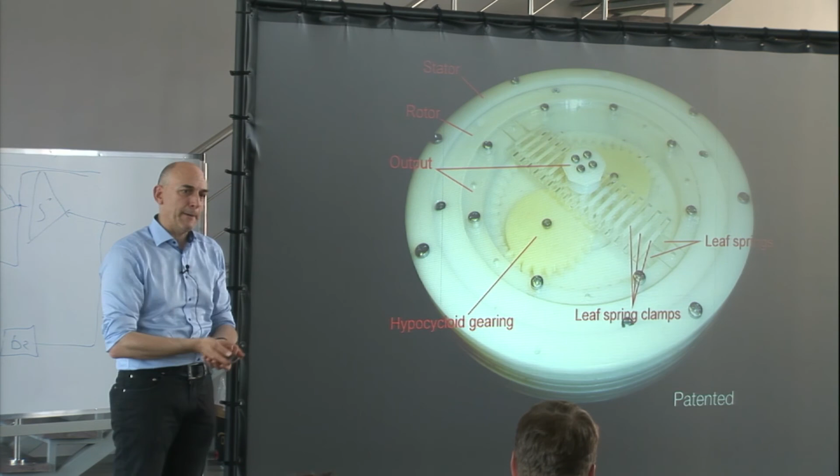But if you have gravity, that's fine, because gravity helps you - you have enough weight, you can move around. But if you are on a straight wall, you have to push it. So the drone basically just applies a force, and the robot moves.

You see, what the heck do you use this for? Well, think about it - whatever you want to inspect which is very high, windmills and offshore applications, or a big building, you want to measure with NDT sensing or something - this is big business. This is something you will see all over the place in a few years, okay?

Because you don't need to scaffold anything. Nowadays, if you want to do something, you need to scaffold stuff and go there, or people need to go by rope and take measurements. You just drive a drone and drink a cup of coffee, and that's it, okay?

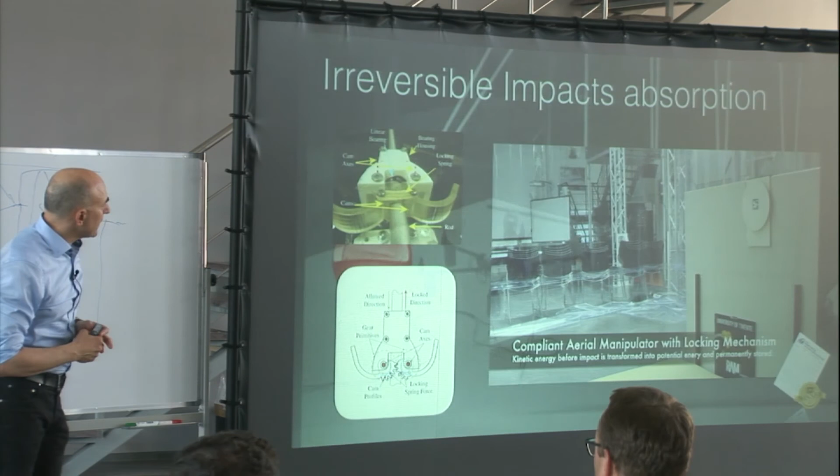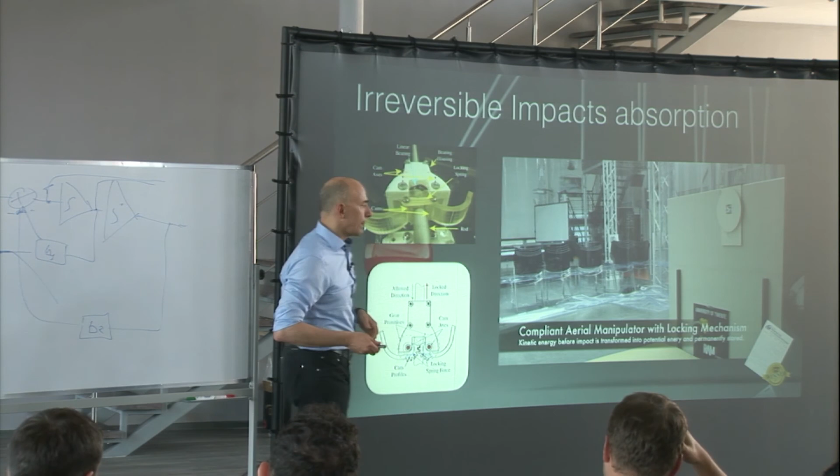And this is something for which we won a Best Paper Award on Robotics and Automation Letters. Look at this drone - it just flies straight against the wall. It creates this system like a damper, absorbs the energy, takes the measurement, flies away. We won the Best Paper Award at RA-L two years ago.

Okay, now let's see, 41 - about halfway now, eh? No, but let's now stop for 10 minutes, and then I will go more in detail. So now I've given you a broad view, and I will show you more how you actually implement some of these tricks in more detail, okay? Good.